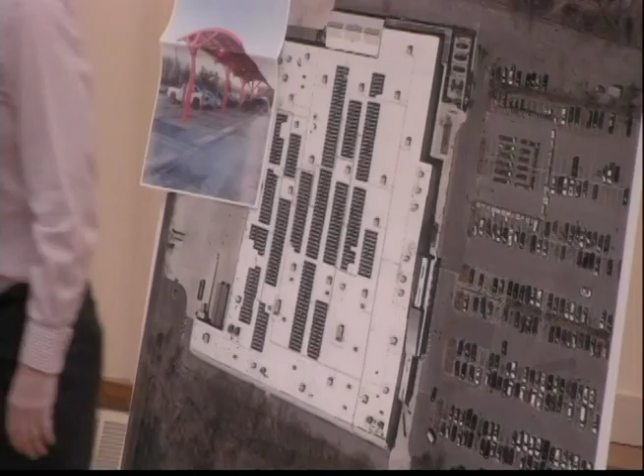And if anybody's interested, this is the fabric that goes over it. So it does, during the day, admit light through it. There are 4 columns as part of this, and of that, there are 2 spaces between each column.

As part of this, we are losing 3 spaces in the parking lot to get from the 13 down to the 10. And given our additional square footage that we're adding of 1,216, we calculate that comes out to 6.8 spaces, so we round it up to 7. So total of 10 spaces we are shy of.

What we are proposing is on the approved site plan, there are actually 20 papered spaces around the bend over here that were not striped. So we're proposing to implement 10 of those to make up for those 10 spaces so that we balance out. I think it's 706 total that was approved with the site plan, less 20. So that's what was striped, 686. So we're looking to maintain the 686 striped spaces.

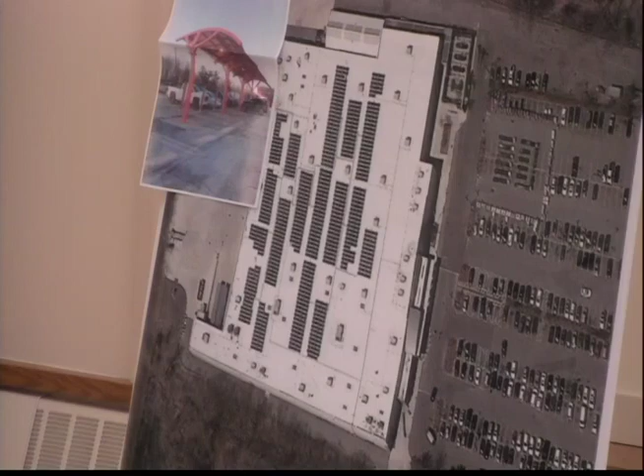Is the intention to make those employee spaces or to encourage? Encourage, yes. So there is also parking here for employees, so we would kind of group that all together. I feel fairly confident that last section of parking there would be across from... This here? Come to the front. Up here? Yep, I have a feeling that tends to be some employee parking there.

So obviously, in losing this section, the encouragement is for those to swing around the back. Correct. While you're replacing the spaces, if you don't get them to come out back, no one's going to know that. For the most part, I did speak to the store manager a little bit. They do enforce it, not heavily during the normal year, but once seasonal comes, they do try to enforce where the employees park.

One other piece of this that was raised by the building commissioner was the seasonal area. As part of their site plan approval, they've got this aerial showing the seasonal area here that they're using. So instead of using that area, because the canopy will now be part of that, what we are proposing is to use, right now it goes from here all the way across and over here.

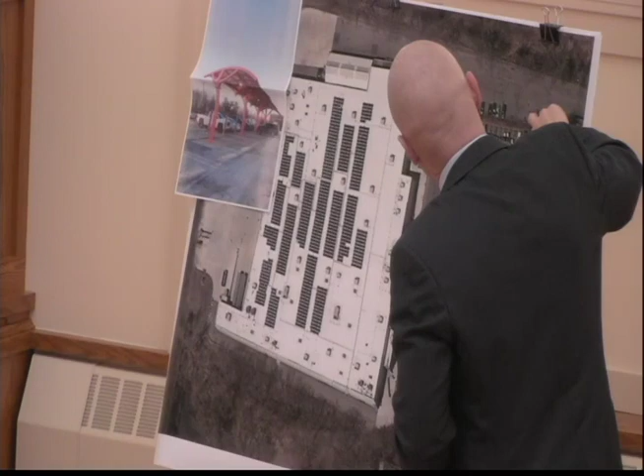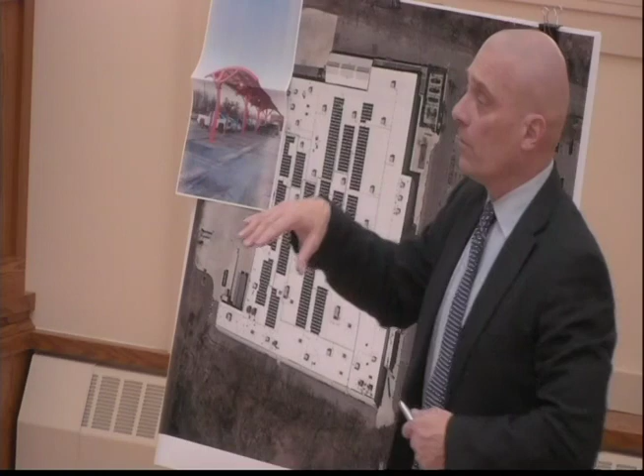So we're proposing to basically keep this section here, which I believe was 11 spaces in this direction, and the total that they had encompassed was 16. So we're looking to just maintain the 16 spaces, encompassing this distance in this direction and cutting down our area. Right now they are just over 11,000 square feet here, and we're cutting it down to just over 6,000 square feet. We don't show that on what was submitted because that question came up afterwards from the building official, so we would include that on our submission.

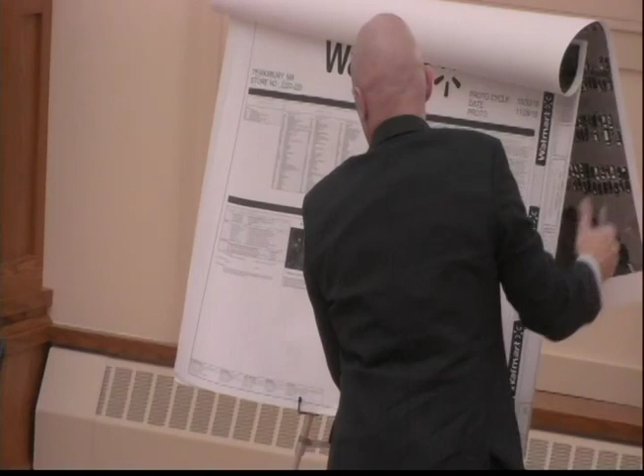The other component to this is our sign. So this is just a color rendering of the front elevation. We are adding a pickup sign here, and this is the canopy in the foreground in the parking lot. And this right here is our new expansion for the marshalling of goods.

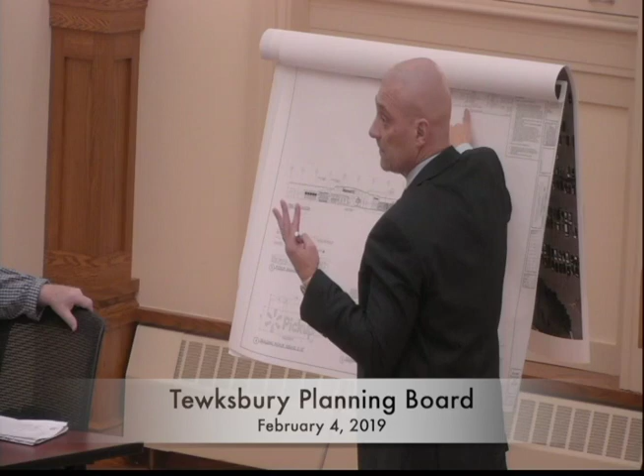Existing signage on the building is 469.63 square feet, with 4 signs on the building. We're looking to go to 5, which would be 535 square feet. And that sign is internally illuminated.

All right, did I miss anything? Go first, start with Mr. Delaney this time. You made eye contact, that was your mistake, come on. I should have known, it's like an elementary school mistake right there.

Well first of all, let me say I think it's a great concept. The elderly people are gonna love it, they go there, they don't have to get out of their car, they don't have to do anything to get their groceries. The only other question I have is the area that you're putting the pickup area into.

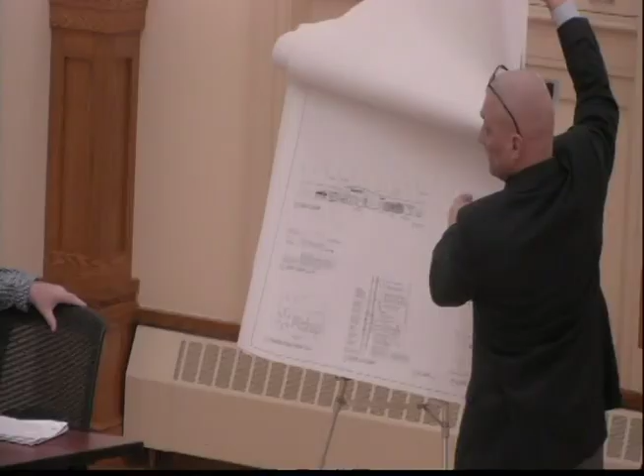There was flowers, plants there. We're not touching the existing landscaped area that's there, we're actually behind it. There's a large concrete sidewalk area. This is the planter right here, and we are actually behind it. So that planter landscaping stays intact.

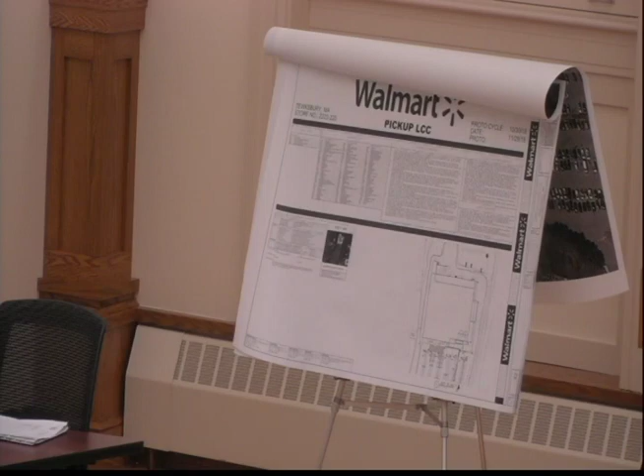Okay, I'm all set, Chairman. Mr. Vitale. Thank you, Mr. Chairman. So you're going to just cover 6 out of the 10 spots? There's a total of 10 though, yes. So why not 10? Just curious.

I guess they found that 6 seems to work, given their timing and need—inclement weather, it's not all the time—and the canopy structure is a prefabricated structure that works in 6. So they've looked at, one of the questions I typically get is how do you determine the number of spaces you're implementing for this, and it usually varies anywhere from 6 to 10.

Some get 12 if they're really higher volume, but what they determine it on is what the store currently does for online orders. So if they have a large tendency of customers ordering online and picking up at the store, then they're anticipating that many more customers will use the online grocery pickup. The funny thing is they found it's really not bringing in new customers, it's their customer base that's using it. So they're working backwards from what's happening today to judge what the need could be in the future.

Okay, another question I have for you. So the customer orders it online through the app? Yes. So there's no money transferred at all? They just come pick up, it's all paid online. Okay, correct. So how many additional vehicles do you expect on a regular basis coming in versus doing the online groceries versus? That's the funny thing, and that's what I was alluding to.

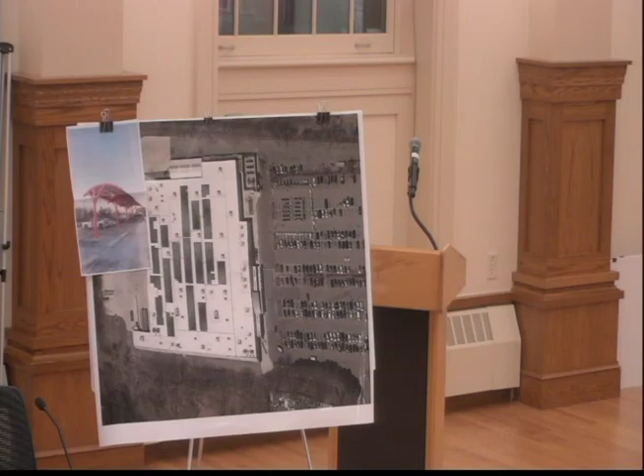Anyone else with any questions, comments, or concerns? All right, with that I'll bring it back to the board. What is the pleasure of the board at this time?

Motion to close the hearing. Motion made, do we have a second? Second. Motion made and seconded. All those in favor signify by saying aye. Aye. All those opposed - motion carries.

As to the permit, modification of the site plan special permit - make a motion to approve the modification as submitted, including the comments made by the board tonight, for the restrictions on noting it in the permit: no pickup in front at curbside, that it's limited to groceries, and no merchandise sales. And the hours of 8 to 8. Obviously if anything like that changes, they'll have to come back. Adding the additional spaces in the back there, and they'll line the spaces we show in the back to make the offset. Again, we'll make note that we've asked that the truck parking be addressed, as well as any debris within and on the soil offsite - I got that.

If there's anything we missed from the notes. All right, so we have a motion made, do I have a second? Second. Motion made and seconded, all those in favor signify by saying aye. Aye. All opposed, motion carries.

Thank you. Any suggestions on who from the town I would set a meeting with for the trucks? Yourself, Anna? Contact me and we'll set it up.

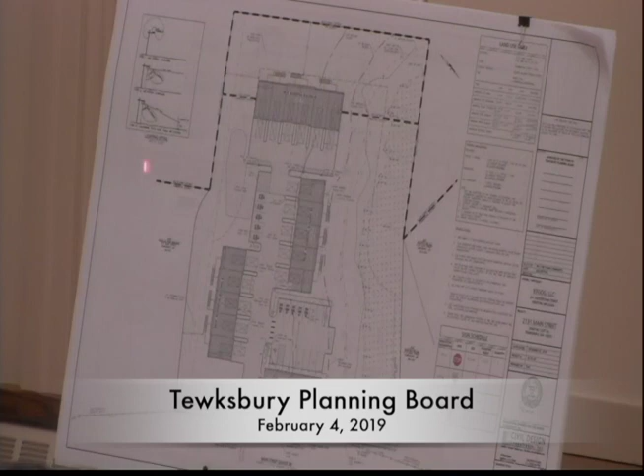So it's complementary. We have a similar style development towards the rear with the condominiums, townhouse-style units, and then on either side, and across the street and in the area, we've got some commercial spaces of varying sizes. So it fits in with the neighborhood pretty well.

We've created some shared parking areas with the commercial parking space and the visitor parking for the townhouses in one space there, and provided sidewalks both along Main Street and in the site to access everything as safely as we can and with ADA compliance. From a transportation perspective, there's bike racks shown on site.

There's also a bus stop, a couple bus stops up at Hill Street, which is about a tenth of a mile away. So we've got a lot of ways to access this, a lot of ways to visit both tenants and commercial spaces and the tenants there.

And then from a lighting perspective, we've shown some lights now. This will be dark sky friendly and pretty low impact to the site. We don't want to disturb the residents here with aggressive lighting, but certainly some to enhance the site and some wayfinding and things like that.

So really what we took away from the last meeting, I just kind of walked through the overall, but more specifically to this board's comments and some of the other feedback that we've gotten. I will say this package just went in recently, Thursday and Friday of last week, so we don't have comments back from TEC, the town engineer, nor did we really expect them, but we have made some pretty significant changes to the layout.

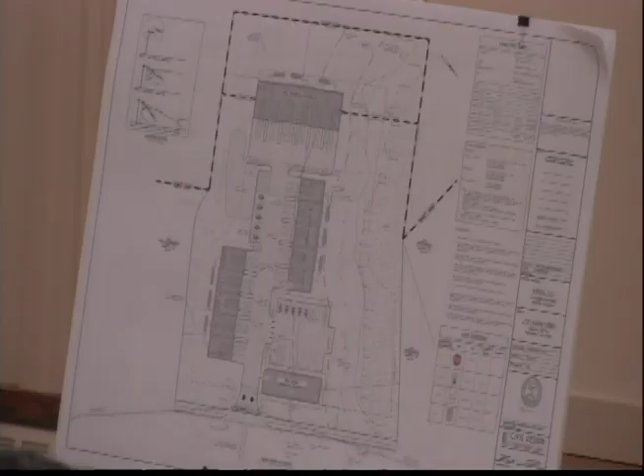Guest parking has gone up by 5 spaces. The 5 you see here were on the previous submission, and we've added 5 more. There's only 10 necessary for the commercial space, and that's a 15-space lot there, so we've striped those as dedicated for the tenants' use of the townhomes. That makes 10 total guest parking spaces for 16 units.

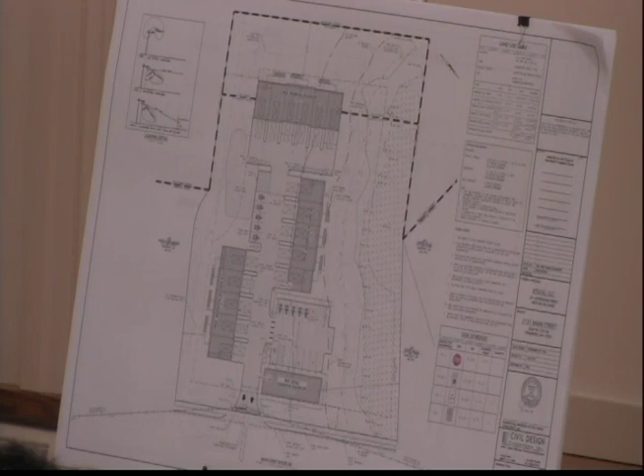Site lighting has been added. And then the other comment was about the Oak Street Way. Last time we submitted a preliminary opinion, really in an email format from our attorney, saying that way has no significant rights in this property. We're still working with her to come up with a formal opinion, so that remains an outstanding item. We feel confident it will be resolved, and that letter will certainly be submitted once we have it.

So the only other thing I wanted to mention before I turn it over to Jim to talk about traffic - I wanted to briefly discuss the town counsel's response letter that was forwarded to us regarding some issues, particularly from the building commissioner. It's been forwarded around, but he touched on 4 items: the Oak Street Way, the mixed-use development with residential and commercial pieces being components of each other, the covered parking, and whether the board had the authority to waive Appendix C, which covers parking requirements.

So in regards to the mixed use, paraphrasing here, the general intent was that the components are simply parts of the whole. There's no one piece, whether it's the commercial or residential, that needs to be dominant. They just both need to be present in order for it to be a mixed-use development.

From a covered parking perspective, again paraphrasing, there's nothing that does not allow covered parking spaces, in this case garage spaces, so therefore it is permitted.

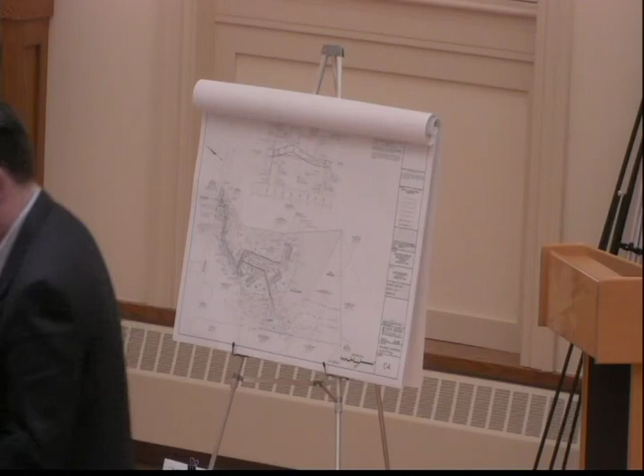We also took quite a bit of pains here to scale back the existing grade and slope to the west of the access drive, to improve our sight distances as a car sits at the intersection waiting to turn left or right.

I just want to show you these pictures looking in either direction from the existing driveway. The existing driveway is only about 14 feet wide, plus or minus; obviously ours will be 24 feet wide, a little further down the hill. On that first page, you can see we don't have good sight distance there currently. Part of our plan is to improve that. We have one existing driveway with not very good sight distance, and we're proposing a private roadway servicing 3 more house lots while improving the situation that's already out there.

On the second page, looking up to the east, sight distances really aren't much of an issue. There are remnants of a stone wall visible on the far right, about a third up from the bottom of the page. That's in the right-of-way—it's not a stacked stone wall, just a remnant of an older one. We have to make some adjustments there to achieve the sight distances we need, but at the end of the day we'll have better sight distances than what's out there today.

Again, this is an OSRD—I don't want to lose sight of that. We have a definitive subdivision as well as an OSRD special permit. The OSRD regulation's flexibility is integral to the special permit. In the purpose and intent, what they specify is to allow for greater flexibility and creativity in the design of residential subdivisions and developments, to encourage a more creative and thoughtful approach to land development, minimize disturbance and loss of undeveloped open space, and utilize and incorporate existing topography and natural features.